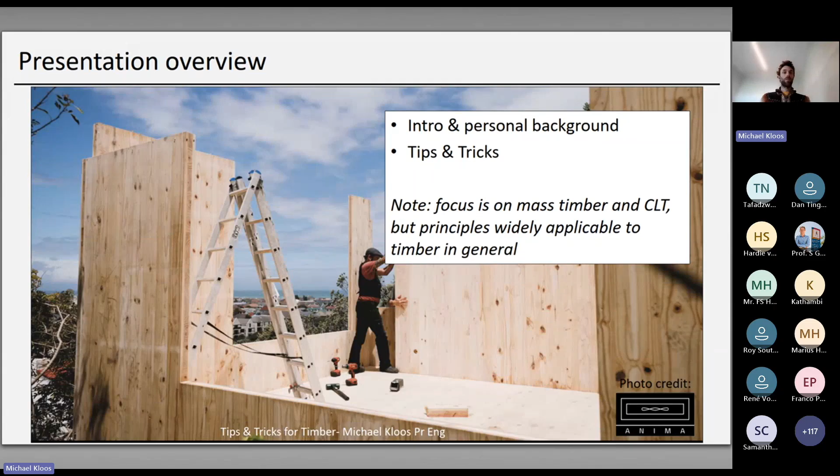So I'm a professional engineer. I'm registered with ECSA. I've been working for 7 years, worked with all kinds of materials, but I really love timber, and I focus most of my attention on timber, and I'm based in Cape Town.

Firstly, the very high variance of timber. So conventional materials that we work with are man-made and have fewer, very highly defined mechanical properties that we know very well. So concrete has 2, steel has 2, brick only has 1 really. But timber has 7 strength values that we use. And this can be a bit overwhelming when one starts, because what do you do with all these values? But I think understanding why it has these differences is an important thing. If you gain a fundamental understanding of where wood comes from, then you understand why it has all these different values.

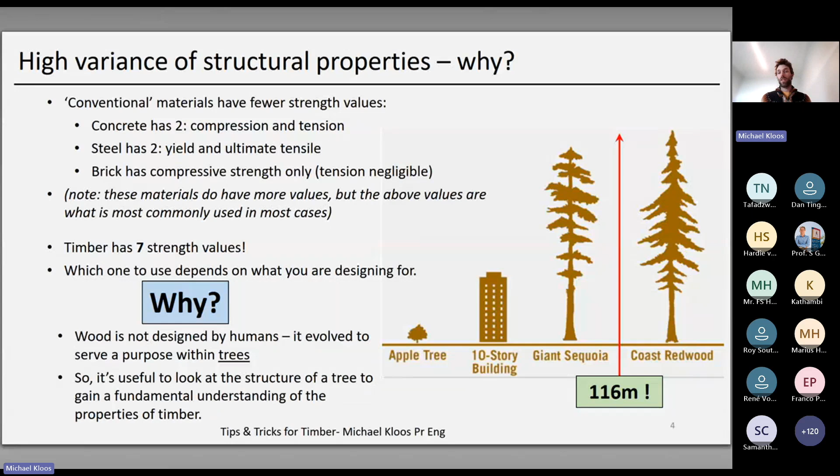So basically, wood has not been created by humans. It evolved in nature to serve a purpose within a tree, and it's done that exceptionally well. If you look at the tallest trees, they're 116 meters tall. A 10-story building is 30 meters, just to put that in perspective. So let's look at a tree and see how it grows. As a tree goes up, the compression at the bottom increases because of the weight, and then as the wind comes from the side, it bends it. So it's natural that these 2 properties, bending and compression parallel to grain, are by far the strongest.

But then if you look at how timber grows, you can think of it as lots of little straws bound together by elastics called lignin. And it has very little strength from the sides, which is natural, because why would a tree need to be strong in that direction? So to give a comparison, the weakest property, which is tension perpendicular to grain, is 1/50th of the strongest property, which is compression parallel to grain. Keep in mind, this is just S5 structural pine in South Africa, but in general, the ratios within timber are similar. So that gives you a bit of background on why the properties are like this, and helps to wrap your head around the material.

All right, the next is the serviceability design. So timber has a very high strength to weight ratio. It's higher, in fact, than concrete and steel. So this is great, but it comes with the downside that the lightness and flexibility leads to other problems, namely deflections, vibrations, acoustics, which together are called serviceability.

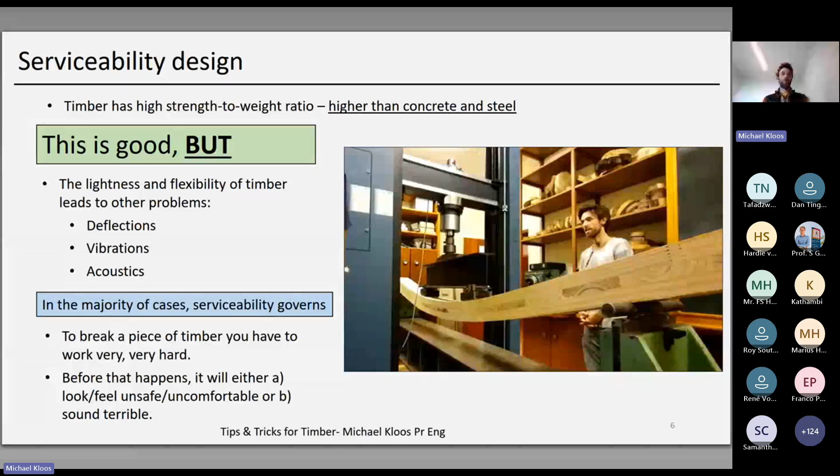So what is the solution for serviceability? Similar to other materials, you use your typical deflection ratios, like span over 300. But important with timber, similar to concrete in some ways, is you have creep. You have to allow for long-term deflection, and this is quite high. It's more or less 1.6 for SA pine in dry conditions, but if it's wet, it will go up a lot. If you have more long-term loads, it can go up as well. So just because it meets the deflection ratio in the beginning doesn't mean you're not going to have problems down the line.

For vibrations and acoustics, I'm not going to go into detail, but for vibrations, I suggest going to the Eurocode, and for acoustics, basic strategies are changes in density, separation layers, which break up the sound waves, and this would be like rubber pads between timber elements, or double wall, something like that. But yeah, I recommend that you consult with an acoustic designer or suppliers for help. So my advice here would just be, don't proceed too far down with ULS design, strength design, without considering these things early on.

For serviceability, a nice starting point are the span tables. So these quickly give you an idea of what it can and can't do. However, you need to understand the limitations of span tables. All of them have got assumptions that have been made, and you need to match those assumptions to your structure. If your structure has different loads or deflection limitations, you need to take that into account. So it's really only a preliminary tool.

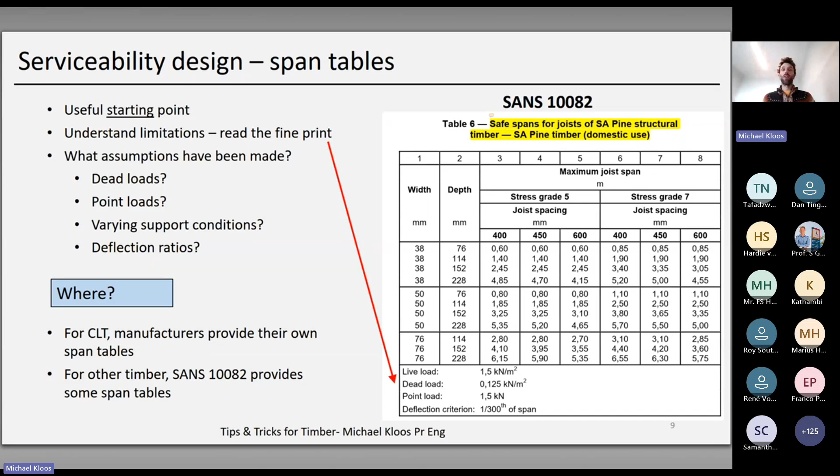Where to find these? So for CLT, the manufacturers have their own span tables. And for regular timber, you can use SANS 10082, which has span tables for your typical joists and rafters for residential and commercial construction.

Next tip or trick is the pre-planning of services. In the planning stage, it's highly beneficial to think quite carefully where those services are going to run, namely electrical and plumbing mostly. For timber framing, it's arguably a bit simpler because you can run it in the wall. There's voids in the wall. Through the studs, ideally through the center line. However, when it comes to the waste pipes, the 110 waste pipes, you have to think a bit more carefully because the typical stud is only 114. So you need to consider where that pipe's going to go. Otherwise, you're going to lose your entire stud.

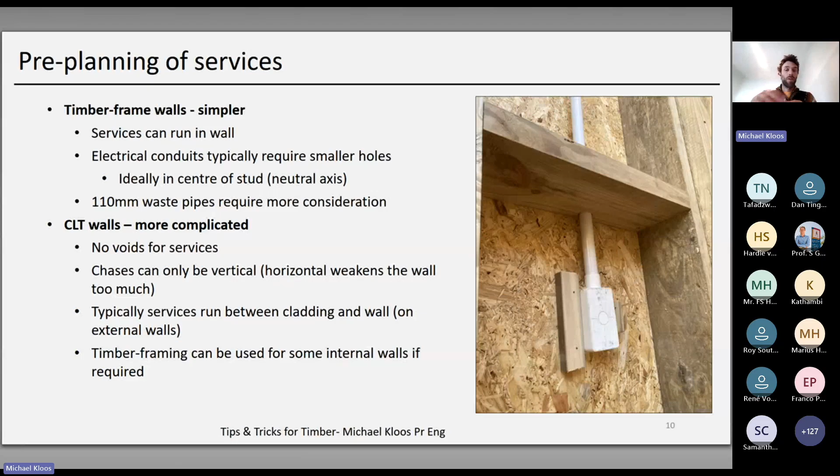For CLT walls, it's a little bit more complicated because we don't have voids. It's a solid piece of timber. So for electrical and for chasing, you can only go vertical on your walls. You can't really go sideways because it weakens the wall too much. If you have an external wall, you can run it quite easily on the outside of the building, but you have to take into account how much space you have. And what you can also do is use timber framing walls on the inside in certain areas to create voids where you can then run your services. So for instance, what we've done before is had timber frame walls by kitchens and bathrooms so that we can run our services in there.

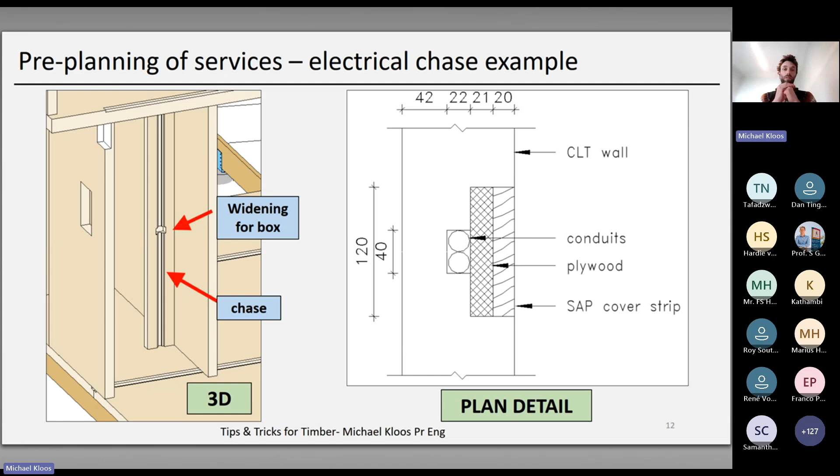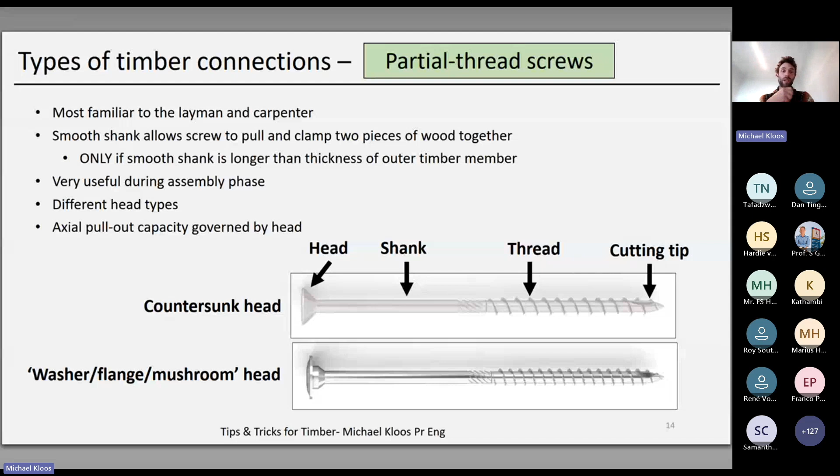And then we get our full thread screws. So these are more specific to structural timber. They are incredibly strong because you're engaging the wood along the full length of the shaft. You're getting bearing everywhere on the thread. You're not just bearing on the head of the screw.

They are more difficult to install though. They provide more resistance and they are more expensive. However, the way it fully, let's say, activates the timber and holds it together is great in a structural or in a building because you really want to hold that building together.

So a common construction methodology for CLT would be to use your partial thread screws initially during assembly. And then once the building is up and everything is flush and you're happy, then the structural fixing comes with the full thread screws. Because if you install one of these screws and there's still a gap between the two pieces of wood, you will never be able to close that gap later because the screw will hold them in place.

Okay, the next one is pre-drilling and whether or not to pre-drill. So the short answer is that ideally you'd always pre-drill because it has several advantages. It reduces the chance of splitting wood, especially if close to the end. And perhaps counterintuitively, the connection is actually stronger. Why? Because as the screw goes in, it pushes the timber away and causes little tears and cracks and reduces thread engagement. If you pre-drill, your thread cuts nicely into the timber and you get full bearing capacity with the thread.

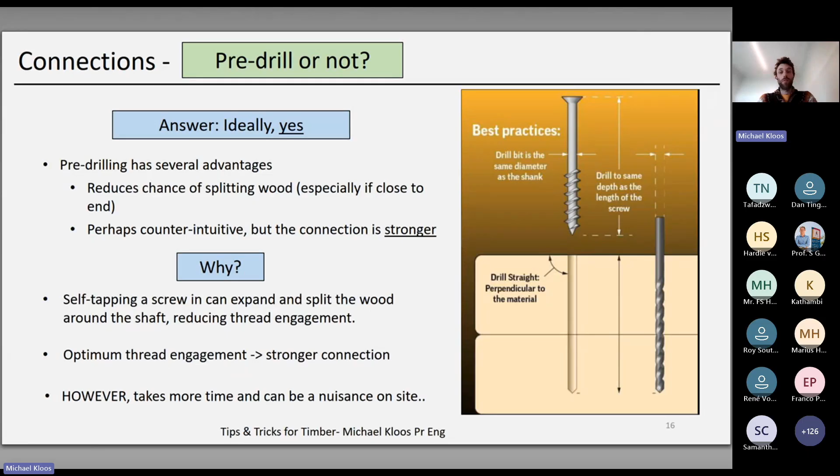Right, end grain. So this is an important one. If you put a screw into the end grain, it's very weak. You're only going to get about 25% of the cross or side grain capacity. So whenever you're going into an end grain, it's much better to try and go at an angle. Eurocode specifies a minimum of 30 degrees. This will just enhance the pull-out capacity.

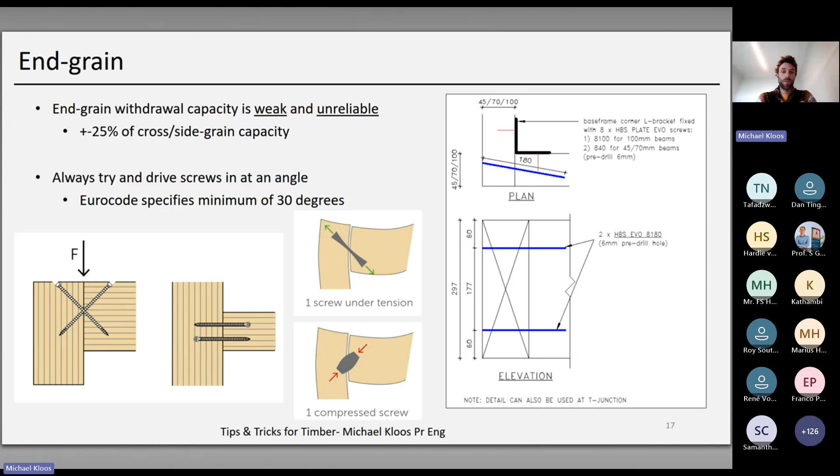Okay, some general tips for connections is to keep it simple. Use fewer types of screws on site. Don't specify 10 different types of screws if you can specify 3 or 4. Keep your details repetitive and consistent, especially within the South African context, if you were in something like CLT where you might be working with contractors who aren't familiar with the methods or the material. And then keep complex connections for complex buildings and simple connections for simple buildings.

Consider your fire resistance early on in the design process if you are needing to do a fire design. Connections are critical in the fire system. And then a useful rule of thumb for timber connections is that a large number of small diameter screws or dowels or nails perform better than a small number of larger diameter fasteners. So it's better to use lots of small connections as opposed to fewer big ones. Of course, this does take more time on site, so there's a balance, but it's a fundamental rule of thumb for timber.

All right, the final tip I would give is don't underestimate waterproofing. Water is magic. It can go in any direction and it will find its way into your building if you're not careful. So in my opinion, you always need to have at least 2 lines of defense against water. You cannot rely on only one system. There's too many variables at play, human error, material. So it's in your favor to be safe here, even though it's going to be a bigger cost. You're going to save yourself a headache, and your client a headache if there's ever a problem.

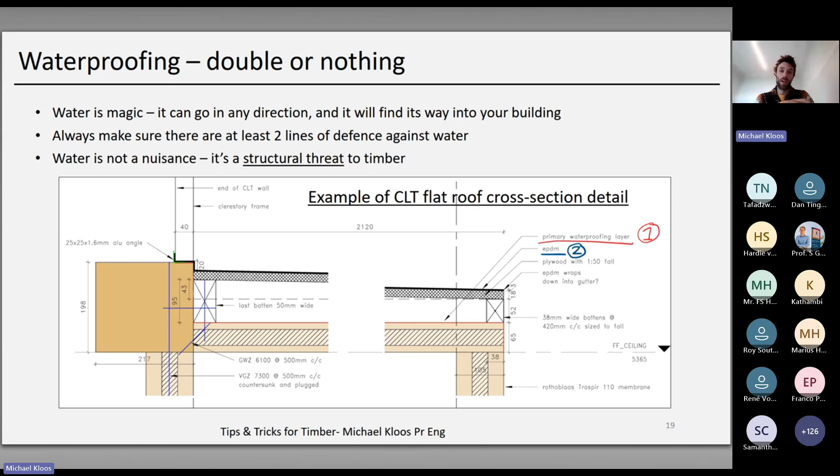The added risk here is that water is not just a nuisance. In a brick building or concrete building, if things get wet, it's obviously terrible. There might be mold or paint coming off, or it's leaking, but it's not a structural threat in the sense that it's not damaging your material. Whereas timber rots when it gets wet and stays wet, and that weakens the material. In the worst case scenario, if you don't know it's leaking and it's in an area where you can't see, the timber could be decaying and it could eventually fail. So there's an added level of risk when it comes to water and timber buildings. That means you really have to prioritize waterproofing in your design.

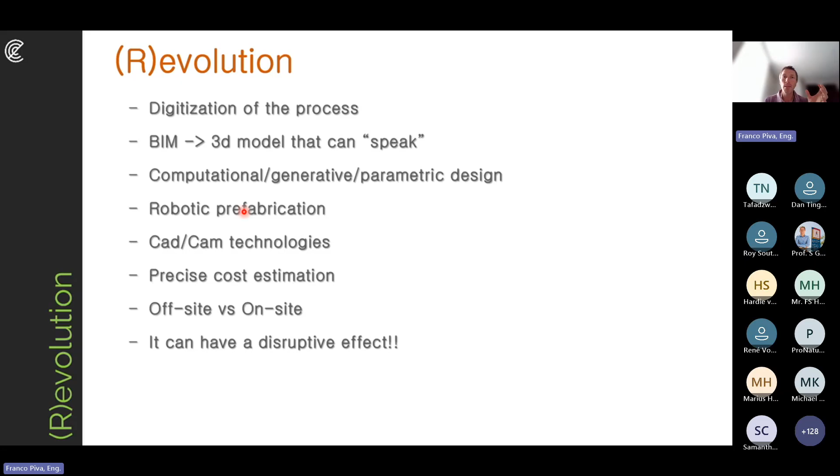We see timber on site, but before having a CLT panel, before having a glulam beam on site, there is a process to engineer it, to draw, to prepare the 3D drawings, to prepare the files ready for the CNC machine. And the acronym I really like, which is behind the process, behind a glulam beam, behind a CLT panel on site, is DFMA, design for manufacturing and assembly.

Three words: design, the engineering process, to draw the element, to think about how the element will be; manufacturing, how to produce it; assembly. There is something in between manufacturing and assembly, which is transportation, logistics. In many cases, for our projects, we have to face the problem: how can we transport the elements from the factory to the site?

Everyone loves prefabrication. We all would like to have prefabricated elements and assemble them in the blink of an eye on site. But how can we transport them from the factory to the site? In the factory, you can manage big elements, super wide elements. But what happens when you have to transport them? So DFMA covers all of this, from the design to the assembly, everything in between.

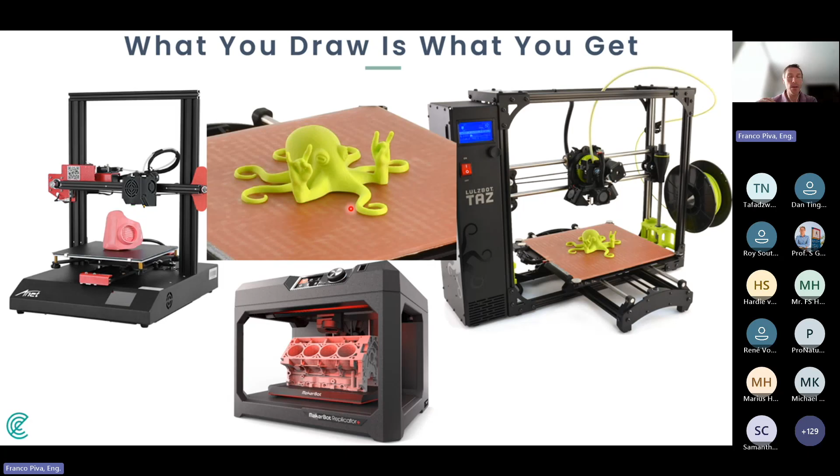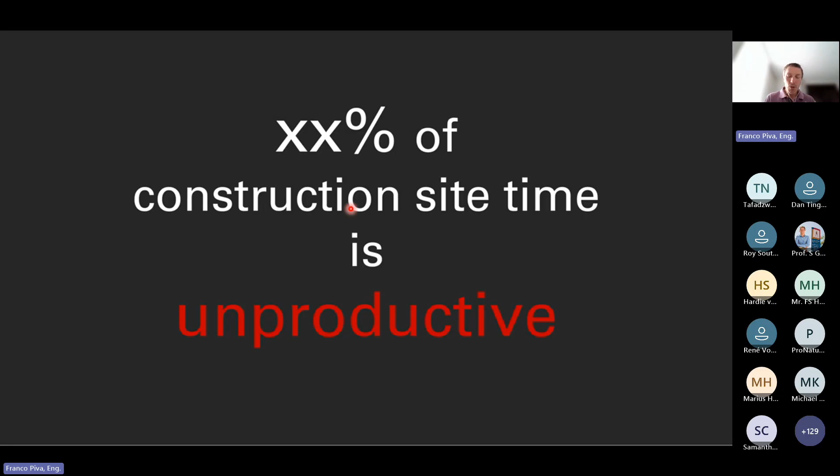In the timber industry, we are not using 3D printers, but we are using CNC machines, which means that there will be a machine starting from a bigger element, removing what is not needed. And basically, at the very end of our work, after we completed the production drawings, we can see on a simulator how the machine will work. We can exactly foresee how many minutes, how many seconds the machine will take to prepare the element. And we can also, of course, check if there are mistakes, if there are problems, if there are clashes in the machine. We can check everything here. We can see if the sequence is okay. If there is something wrong, here is the right time.

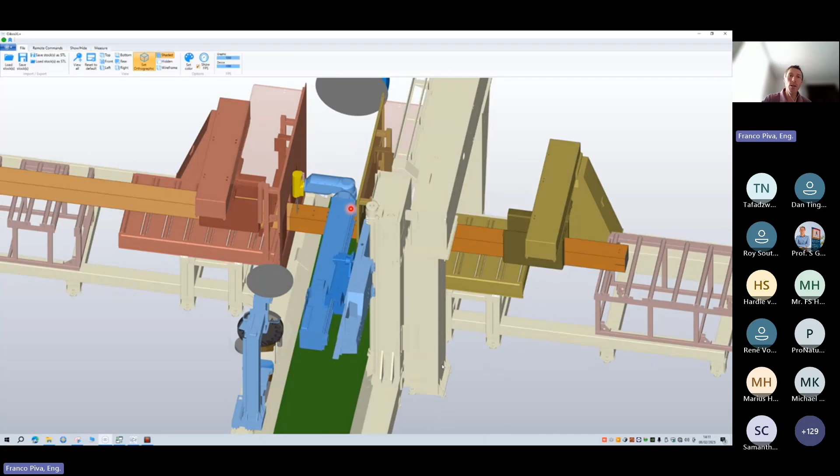And to check here, the model is for free. It doesn't cost anything. It's just a few minutes for us to check if everything is okay. Having a problem in the production takes a lot of time, a lot of money, a lot of problems, people yelling at you, etc. So again, first design and then the production.

There is a book I really like, and I suggest you read it if you have the possibility. It's written by a Danish professor, Bent Flyvbjerg. The title of the book is How Big Things Get Done. And if I had to summarize the book in just 4 words, I would say: think slow, act fast. Take the time to design. Timber is beautiful, but using timber is not like we start doing something and then we will see on site later what to do. No, with timber, you need to shift everything to the beginning. Design, and then you assemble the elements on site.

The bad side of that is this: Pareto's principle. Pareto is an Italian economist, an Italian engineer. He lived like 140, 150 years ago. He said that 20% of the people in the world own 80% of the money. Probably now it's more like 1-99, but at that time it was like 20-80. I try to reuse this principle, to adapt this principle to the building industry. They use this 80-20 for many aspects, but I said, what if we try to use it in the building industry?

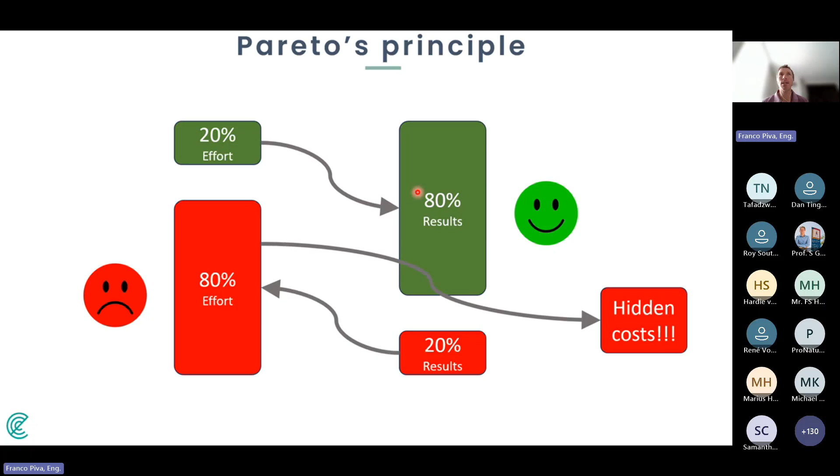With timber, this is the biggest problem, in my opinion, because the drawings have to be so detailed on the production side. We are not saying that the architects and engineers need to prepare such super detailed drawings. But as timber engineers, we need strong and reliable input from you, good drawings, because the digital model is super detailed. Every single element has to be drawn. And then once you're on site, what you see on your screen is what you get on site.

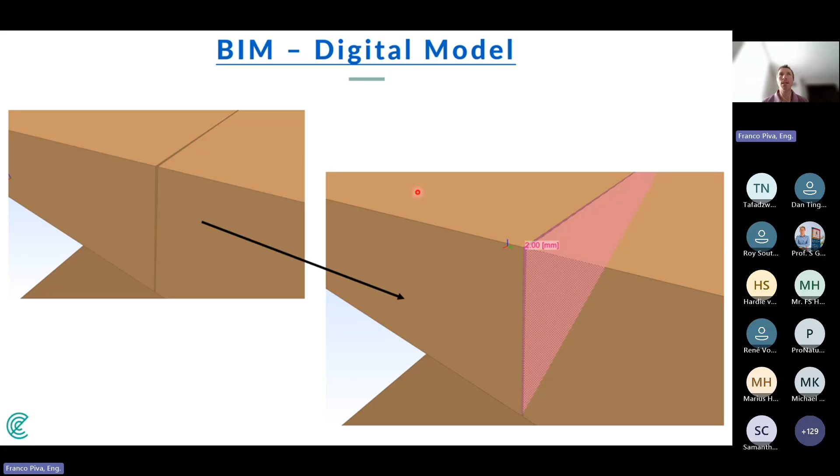It's like a 3D printer. You create a very sophisticated drawing, but then there is a CNC machine making it, and you see how it will look. But you have to consider every single millimeter. If the tolerances are 1 millimeter there, 2 millimeters there, 5 millimeters there, not you as an architect or engineer, but the timber engineers have to take into account all these tolerances to avoid problems on site. We always aim to reduce the wasted time on site. We always aim to reduce the unproductive time on site.

I like Lego. I've been playing with them since I was a child. And think about this. This is one of the nicest boxes they created. How long will it take to assemble this box or other boxes? And compare this time to the time Lego took to engineer it. They took years, 1.5, 2 years, many people working on that project. But then you don't take 2 or 3 years to build it. In a few hours, you can build this amazing car.

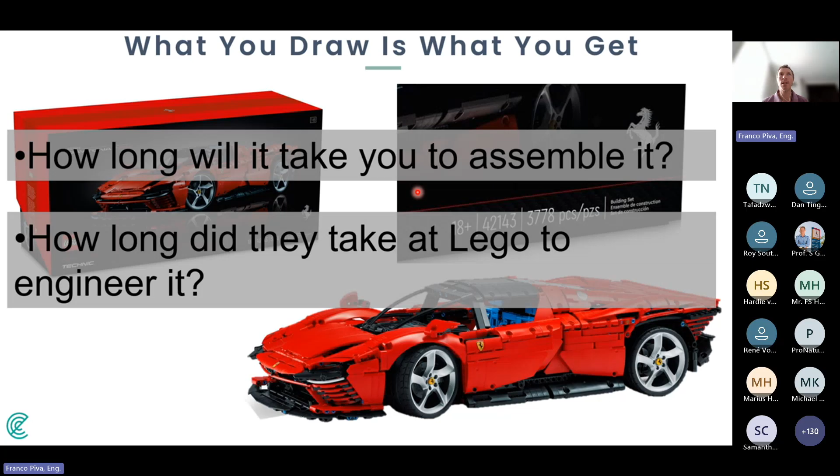Why? Because there is a good project behind it. There is a project, instructions, you assemble it. You don't have to drill holes to change the element, or wait to have the right bricks. And again, the core is think slow, but act fast. Take your time to design and save time, a lot of time, on site.

So let's come to the conclusion, the last 2-3 slides of my presentation. Look at the MacLeamy curve. Horizontal is the time, vertical is the design cost, effort. Look at the orange line, the cost of design changes. The more you go to the right, the more expensive the changes will be. But at the same time, look at the blue line. At the beginning, you can change the project completely. Day one, you can change everything. Low cost, high impact. Low cost, orange, high impact, blue.

After a few days, it will be mid cost, mid impact. And then there is a day too late. This happens when, like after 3 months working on the project, the client or whoever, the developer, the builder, tells you, you know what, I would like you to make the building a bit bigger. That is the day too late, which means low impact, high cost.

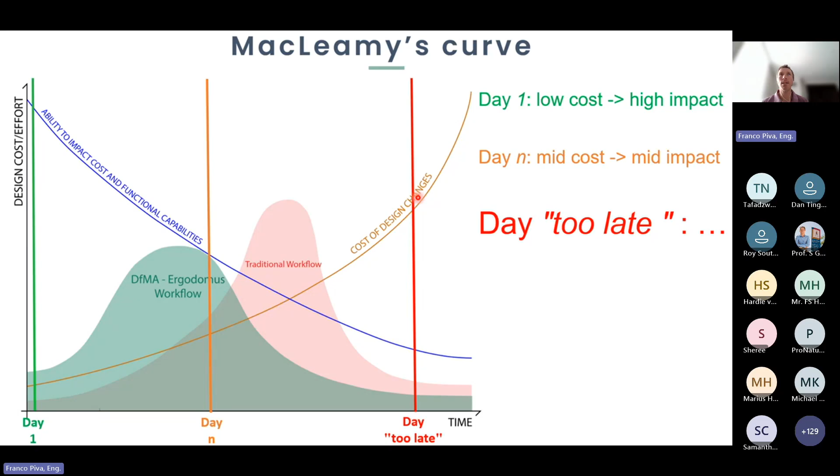If you transfer this to the world of timber, I like to use this metaphor. Day N to day too late is mass timber. But if we start thinking about using timber on our project from day one, then it is smart timber. After day too late, and it happens many times, they involve us, or they try to involve us, after day too late, it is mess timber. And in terms of costs, this is what happens. Mass timber is quite expensive. Mess timber is terrible. It's too expensive.

So the conclusion in many cases is, you know what? We wanted to go for mass timber. We love timber, we love sustainability, etc. But timber is too expensive. We'd better go for concrete. It can be that timber is expensive. I'm not saying the opposite. But when did you start thinking about timber? Because if you started on day too late, for sure timber is too expensive. No way, it's too expensive. If you started on day N, quite expensive.

But if you start from day one, and as Michael said, you consider all the things about the vibration, deflection, screws, since day one, the very first day, you're still working together, architects, timber engineers, structural engineers, to come up with the most optimized solution to use timber. In some cases, it could be like you move a wall by 30 centimeters. You optimize the shape a bit.

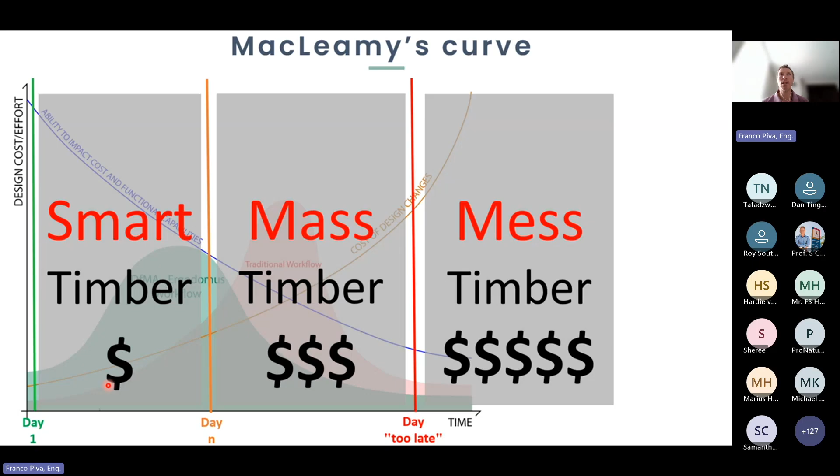We're not talking about building boxes. We're talking about making timber the most cost-effective material to go for. But this has to be done on day one. On day too late, it will never succeed. It will be just pain and a lot of emails, etc., between the different players. So we really need to move from mass timber to smart timber. And this is the solution of the

answer to the question. As a final slide, 40 to 50% of construction site time is unproductive. Try to think about the example of the 100 days. You have people working 100 days on a site. Every day, instead of working 8 hours, it's like they work 4 hours, more or less, 4 or 5 hours. Maybe one day they work 8 hours, but the day after it could be just a couple of hours.

This is a general number, based on research I found on the internet about productivity in Europe. Maybe in North America it is a bit different, in other areas it could be a bit different, but it is always around 40, 50, 45, 55. That is the range. The most productive, the most efficient industry, or one of the most efficient industries, is the automotive industry, and their unproductivity is around 3 to 6, 7%.

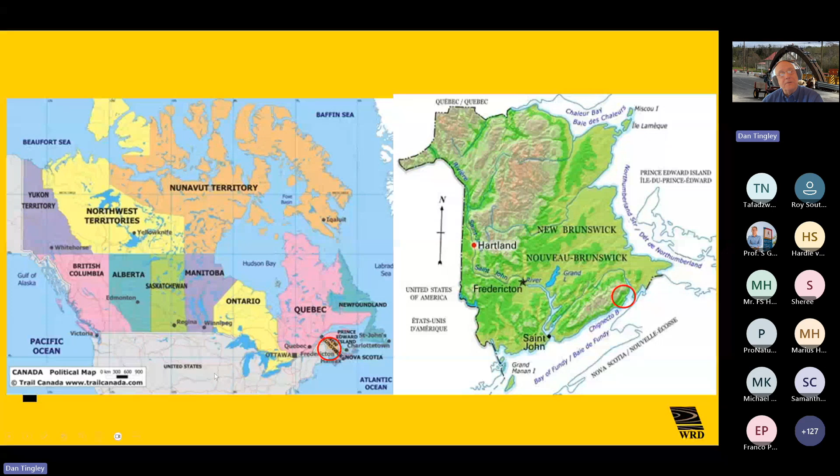Samantha mentioned I'm currently in Eastern Canada on the East Coast, about 1,000 miles east of Franco, on the Fundy Coast. And you can see here a little map of Canada, and a couple of circles right where I'm located today, just for those that are interested. If you're ever out this way, come and visit.

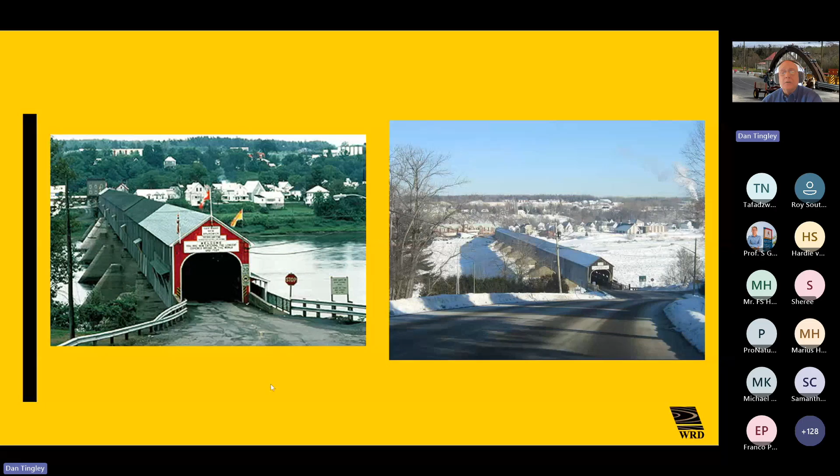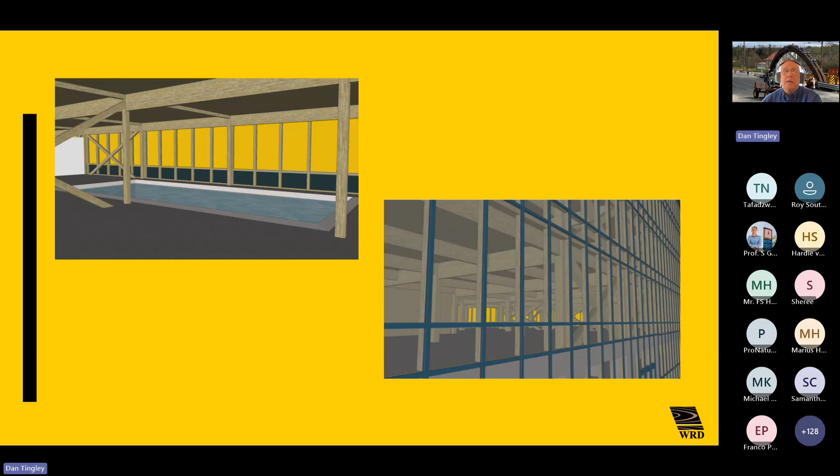But that's where we're at today. And the sorts of things we do at our lab is look at fire testing to develop strategies for fire resistance ratings, assemblies of systems that will provide for fire protection, and those different fire protected systems allow us, for example, to build these high rises either using CLT or an assortment of different timber strategies.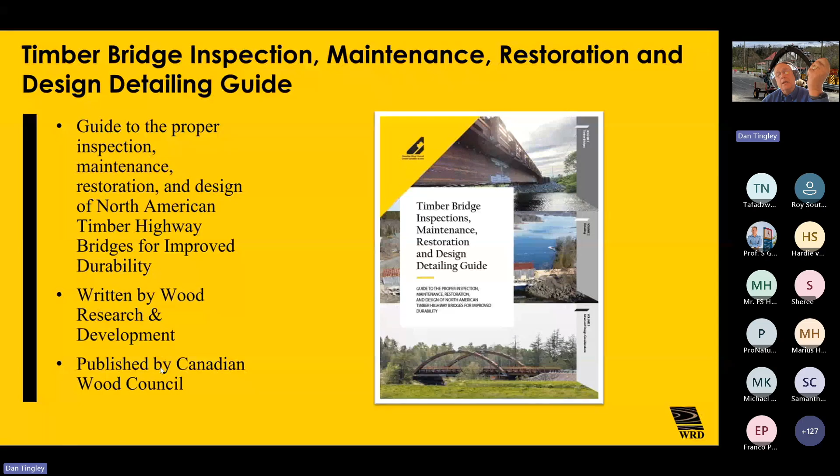In 1962 in North America, 80% of our bridges were timber. By the time we reached Y2K, less than 1% were being built in timber. Today, that's moving back to timber as cost advantage and carbon concepts are all impacting the way we think about timber in outdoor and timber structures. So these are important aspects of what we do today in terms of our designs.

Not bragging, just a little bit of expression and novelty here. In '96, we won the Charles Pankow Award for Innovation for High Strength Fiber Solutions. In '97, the Nova Award, which is all construction products, for high strength fiber solutions in their design. That's led to many award-winning designs. As you can see here, this bridge, for which we recently won 4 different awards for carbon.

This bridge was to be built in steel, and timber was opened in the tender. A specification allowed us to submit a timber solution, and the steel solution in this bridge was 2,760 metric tons plus. This timber solution was minus 970 metric tons. And so these are some of the reasons, along with cost. This cost was 32% less than the steel option.

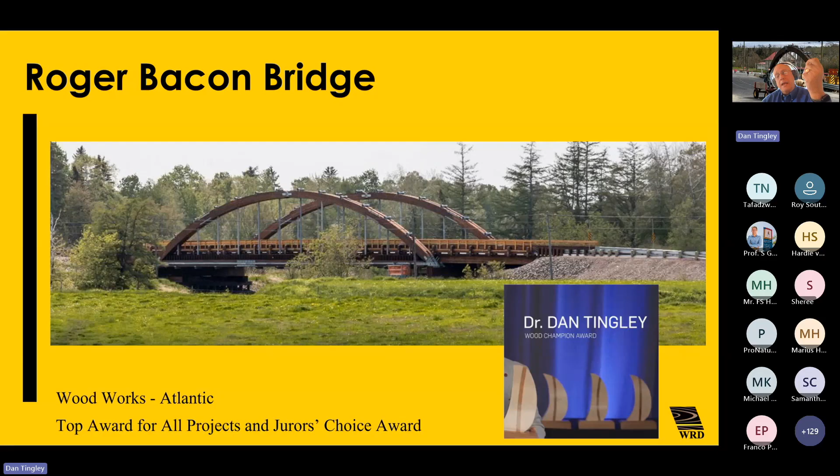It took half the time, as Franco talked about, building a Lego kit, treating it after you've machined it so that there's no bright wood, and then building it on site in half or a third the time is the tip to winning not only these awards, but the hearts of your buyers. So 50 years ago, my designs looked like this.

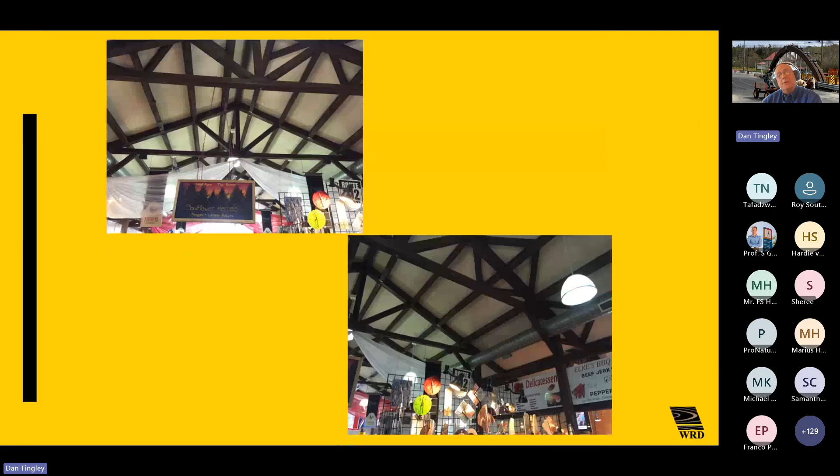Or this one in 1988, 535-foot clear span, 14 stories high, all timber. I didn't call it mass timber back in 1988. I just said it's a glulam building. It's 2/5 of a basketball, and we're going to store coal in it because SO2 isn't a problem for timber, and concrete and steel just wouldn't cut it. And so these structures were very popular in the day for things like potash, for example, and still are today.

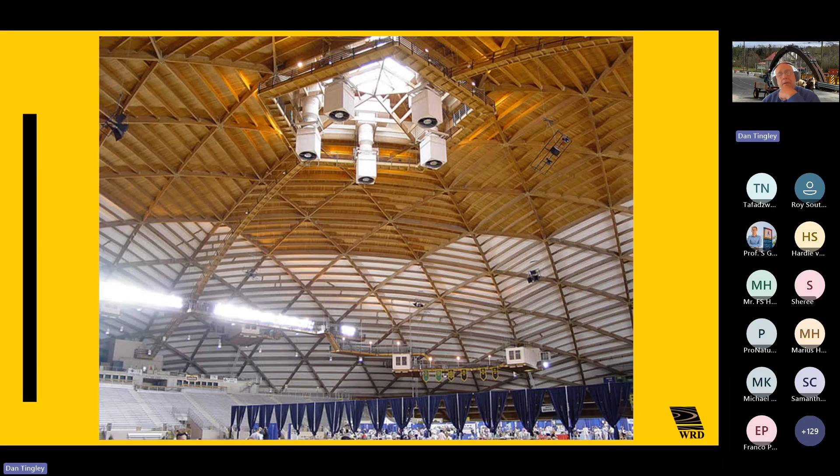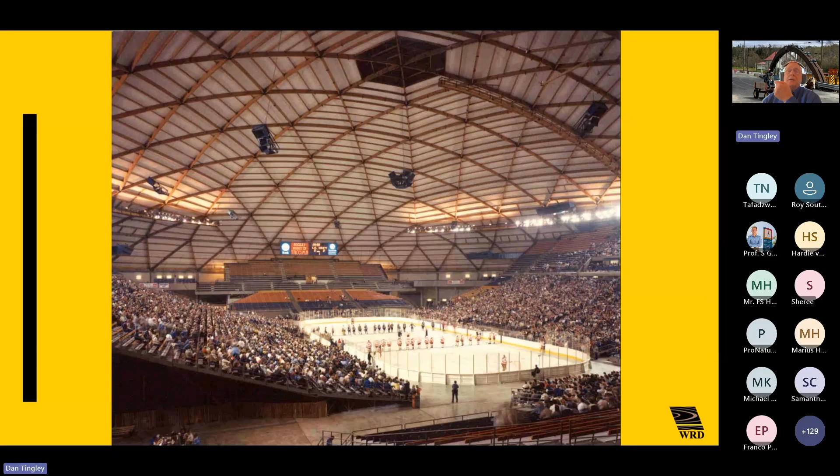Flagstaff, Arizona, for example, with a Varax dome, it's 2/5 of a basketball. Tacoma, near Seattle, Washington, as you can see inside here, all timber. And these are dating back to my early days in the 80s and 90s. This is in Vienna. It's a wastewater treatment facility. Only the Viennese with oil money could make a wastewater treatment facility look like these reinforced S-curve glulam beams.

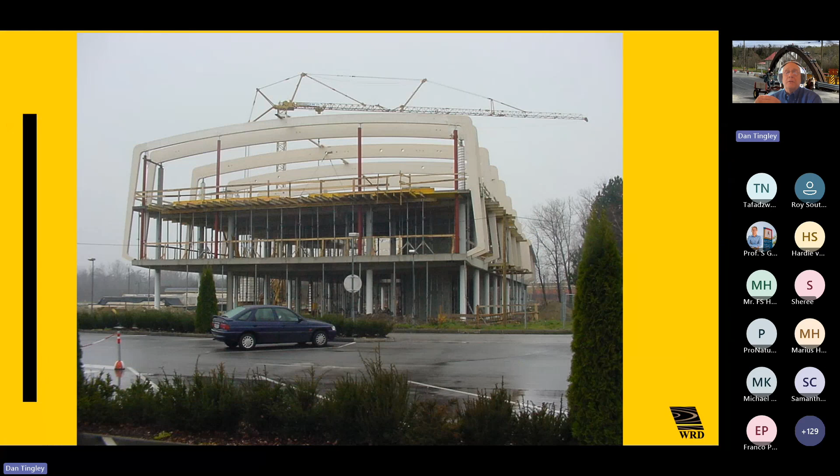Or this one here, it's a furniture display hall. This is what it looked like when it was finished 25 years ago. And as you can see here, even a mass timber walking tunnel in this particular building. This is under construction. And this is a unique building with a knife plate, dowel, a rigid C shape on top of a pinned connection in a concrete column.

I was visiting a bunch of old structures I designed back 25 and 30 years ago. And this is one of the owners here of this current building right now, very happy with this mass timber building, built 25 years ago with timber.

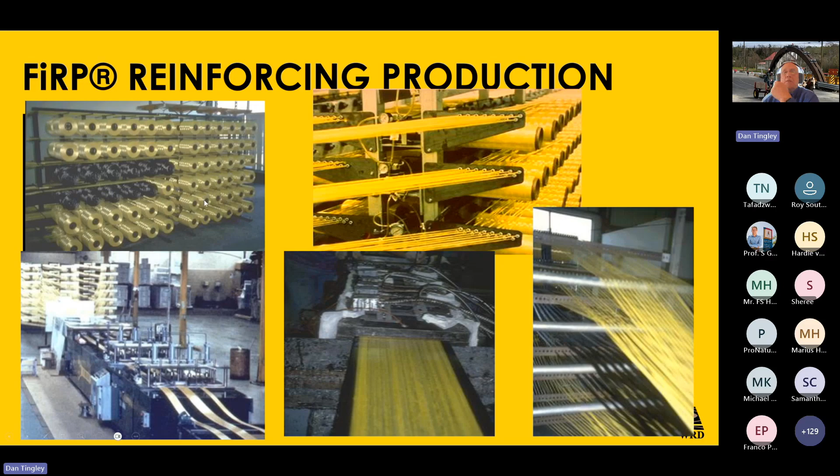So I have a few patents in this area, most of them off now, 42 to be exact, in this whole area of producing reinforcement using Kevlar, carbon, glass, pre-tensioning, pultrusion, pulforming, allowing the fibers to get saturated with a resin in its liquid form, kicked over in a heated die that allows it to turn into a solid, with up to 1 kilometer of fiber on one reel, 5 times the strength of steel at 1/5 the dead weight.

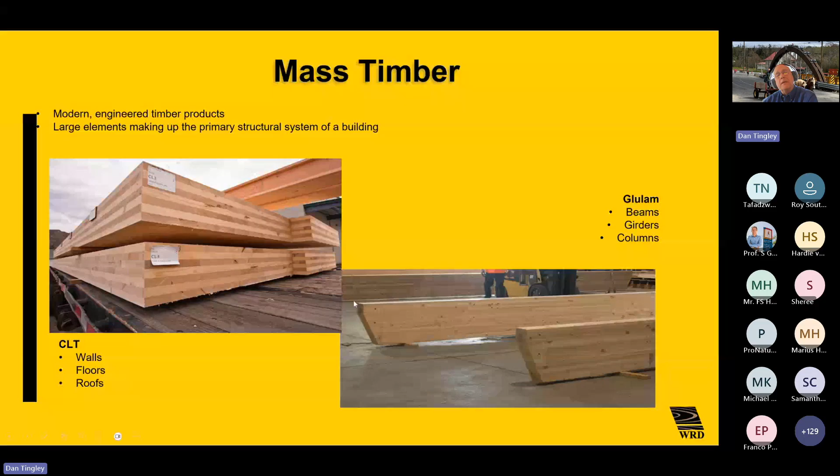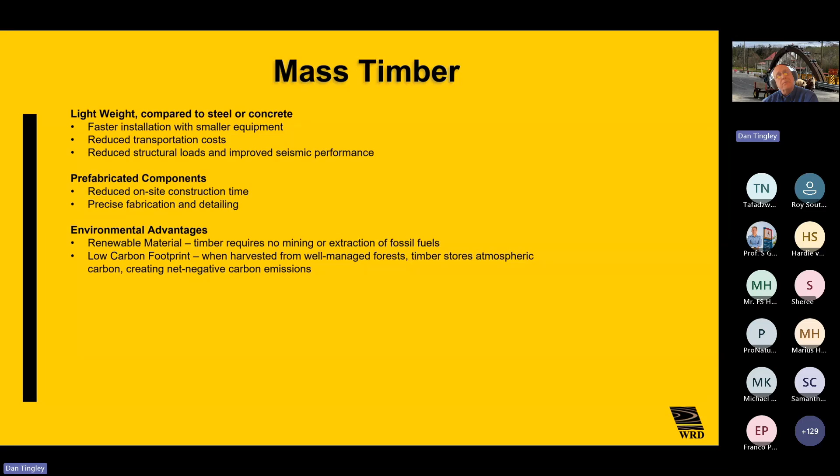As you can see, CLT and GLB, glulam beams, 2 examples of mass timber here. Lighter weight compared to steel and concrete, fast install, reduced transport. You can prefabricate your components, environmental advantages like low carbon footprints and renewable material.

Everything from nail laminated timber to GLB to solid sawn to CLT panels that go on top of these post and beam or platform frame structures. You can see LVL, another form of it, Paralam, PSL, LSL, all of these different types of mass timber, from oriented strand board to the traditional plywood. Wood is back in action.

When I graduated back in the early 70s, I was 1 out of 14 people in a class. And I watched the great era of precast concrete take place in the 80s, 90s. There were 36 glulam beam plants in Canada with the highest production of glulam in the world per population, turned away to 3 plants by Y2K.

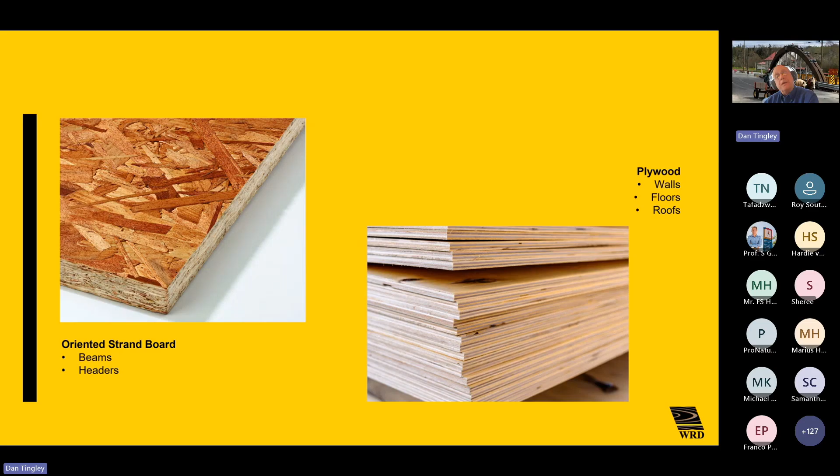That's back on the move now as we see glulam beam plants setting up all over Canada and all over North America, producing these sorts of structures, as you can see here, in different parts of Canada. All mass timber, all going higher and higher and higher.

We have an office in Saudi Arabia where they tell us now that the Saudis are looking to build a 126-story building by 2030, platform frame concrete core using CLT. So these are the ways things are going in our world today as we look at timber coming back in vogue for uses not only for swimming pools, where they're obviously a better choice due to the fact that wood just doesn't rust, but for a host of other reasons. These are the current structures that we see all over that are going forward.

So how does advanced fiber fit into the equation here? In everything from tension reinforcements to shear reinforcements and so on. Well, the primary place that we look to have high strength fiber is to increase the capacity of timber structures. Timber is anisotropic. That means it has different properties in different directions. And some of its weakest properties are tension perp, as we heard earlier. And as a result of that, what we can do with high strength fiber is use it strategically, like rebar in concrete, to supplant the weakness in the anisotropic material wood.

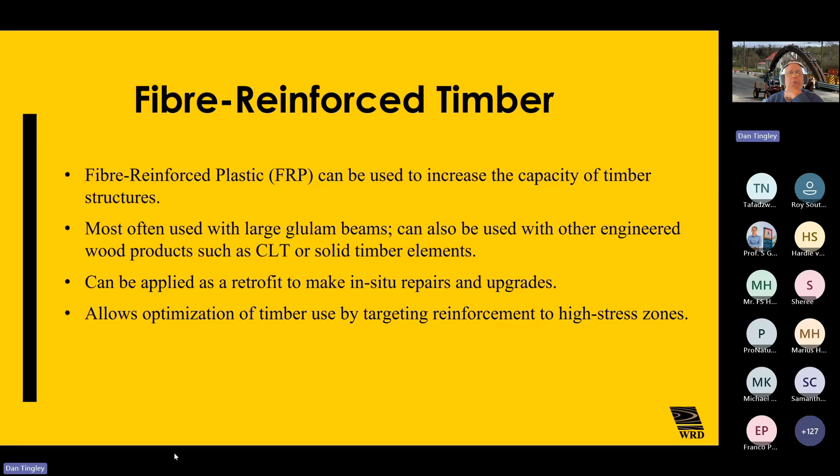But if we're going to do that, we have to also be careful that the wood is hygroscopic. That means it breathes in and out moisture, and when it does, it shrinks and expands. And so anything we're going to attach to it that is not organic and doesn't have those characteristics, we have to be very careful how we design it so that when it attaches to wood, it doesn't spall off or delaminate over a period of time, so the plane sections no longer remain plane, and it's not a true composite. So this is how we work toward this in our reinforced concepts to be able to get where we're going in terms of using high strength fiber.

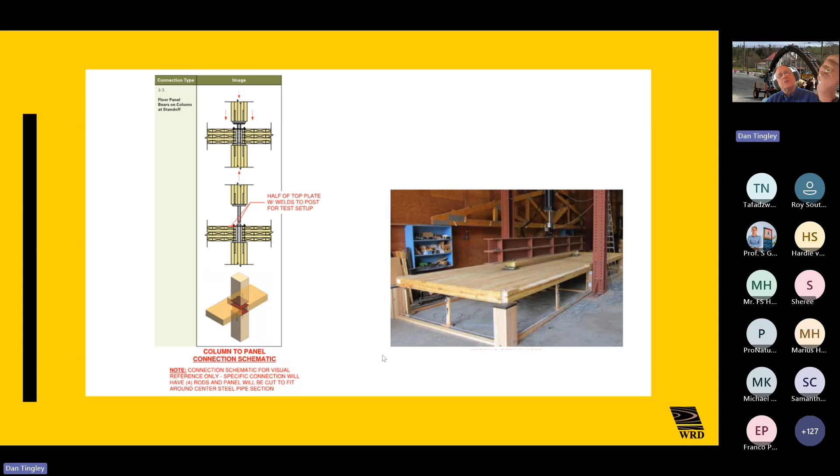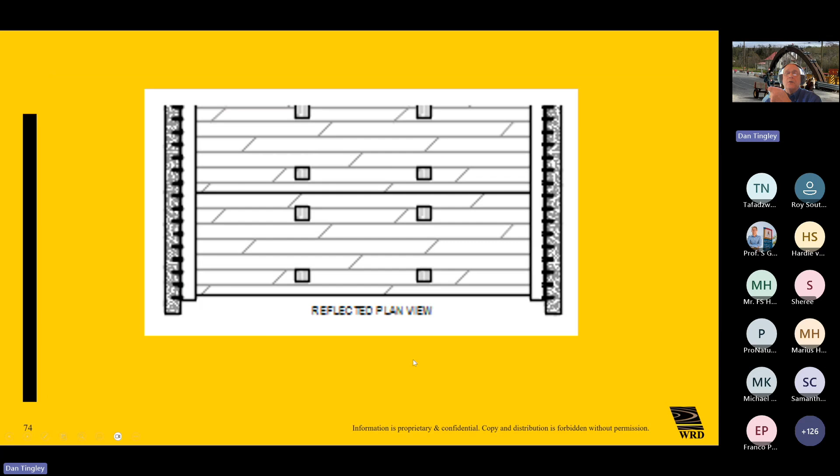One of the key places that CLT is benefiting from high strength fiber is through the improvement of minor axis horizontal shear capacities in either a platform frame or a post and beam frame, as you can see here. Particularly in the platform frame, we see this problem as a big one traditionally with CLT because of minor axis, what we call rolling shear or transverse shear. And so this is a big feature in CLT that reinforcement allows us to overcome by the placement of shear reinforcement in strategic locations, for example, at the CLT interface with a vertical column, as you can see here, leading to these sorts of advantages in our system in platform framing.

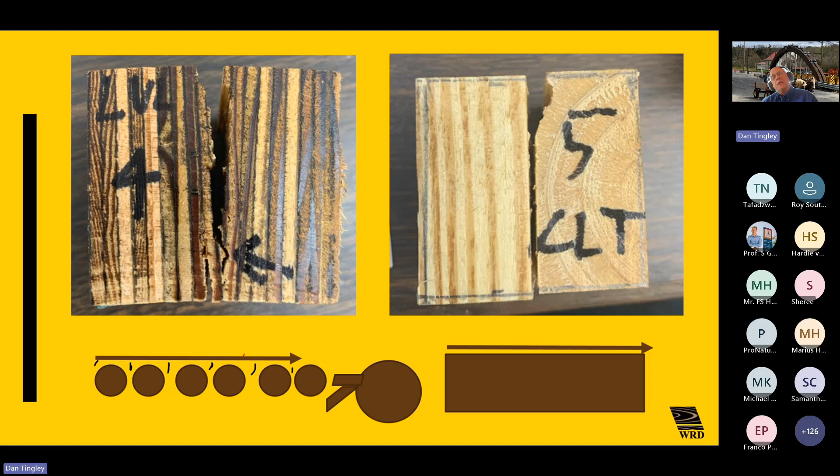I won't belabor this, but if you want to ask questions or seek information from me after, you can see the enhancements here from using high strength fiber to overcome these problems, such as rolling shear. And rolling shear used to apply just for plywood, for example, because of the transverse grain situation in horizontal shear. But as you can see today with CLT, it also is a factor, as you can see in this picture.

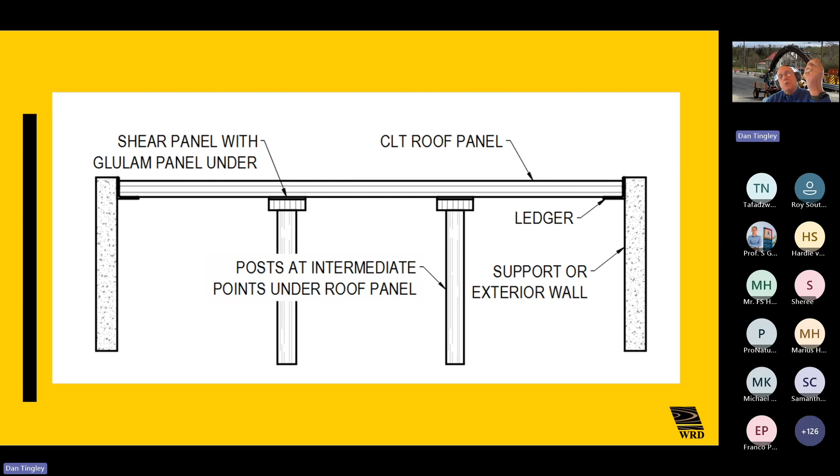So this is how platform framing allows us to use high strength fiber and get where we're going to reduce minor axis shear. And here's an example of a minor axis shear reinforcement, as you can see here in the picture. And you take a CLT in this minor axis shear issue, it can either be a piece of FRP or bonded a piece of GLB, but the most effective and unobtrusive solution is, of course, to use thin layers of FRP that get in and do their strategic jobs at these locations.

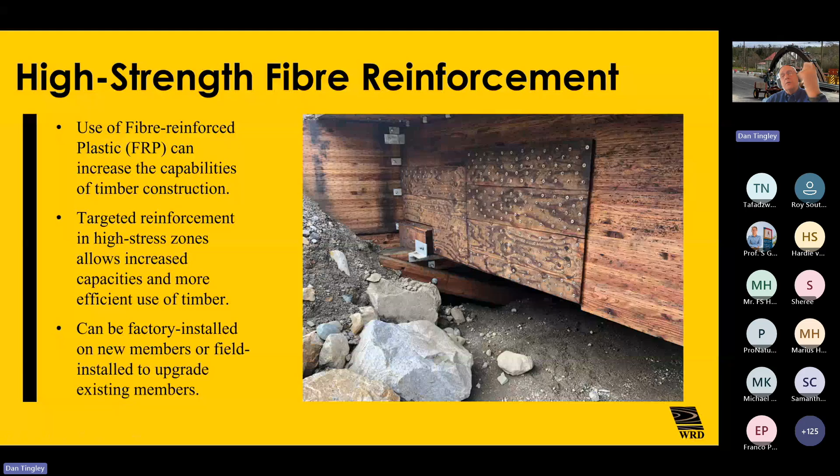You can use them also in reinforcements for shear for bridges, where the shear is a max at the end of the span, and you're able to improve its performance either by pre-assembly, as you can see here. This is where bridges are going today in the world, with total pre-assembly with a TL4 truck crash-proof rail system, and as you can see here, the girder unders. And these high-strength fibers are allowing our spans to exceed previous spans.

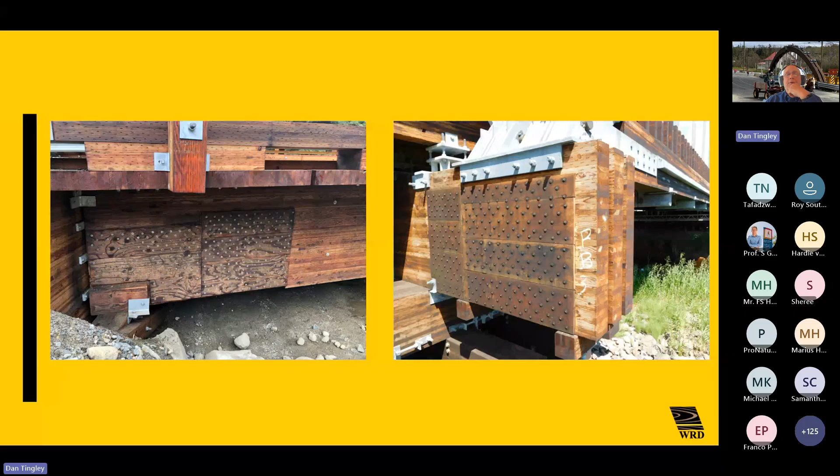We now work with girder under spans through FEMs, which I'll talk about here in a minute, fixed end moment connections that allow us to move up to 100-meter clear span girder under and carry trucks and traffic on a 4-lane highway bridge. And so that's where this is going with these small components that use these high-strength fibers as a way of improving performance in the end product, the composite.

It has a coefficient of thermal expansion that about matches wood versus steel, which doesn't. I can't have plane sections not remaining plane, so I have to bond it with a material made in a way that accommodates wood shrinkage and expansion also transversely. So this fiber has 0 strength transverse and 5 times the strength of steel on the longitudinal. And that single piece of glued reinforcement we're using here, 0.07 inches thick, is equal in tension capacity to the whole timber beam that you see supported here.

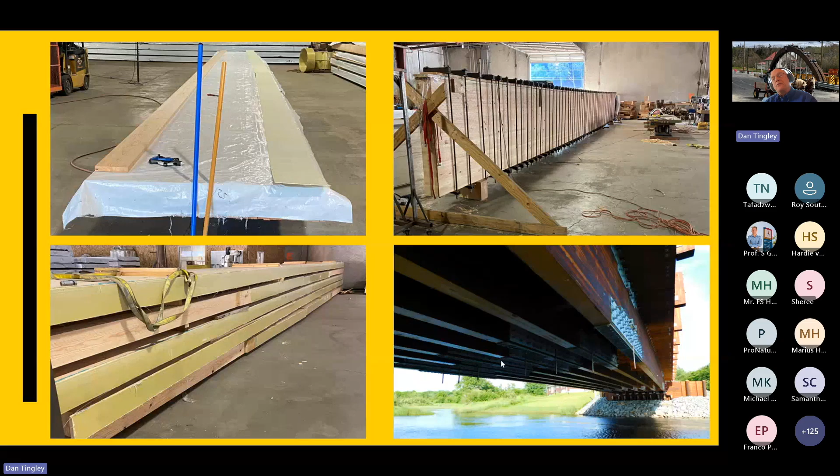So then when I get in a strategic location, as you can see in this bridge on the bottom right-hand corner with an FEM wood welding joint there at the end, you can get that reinforcement to do the heavy lifting you're looking for to get timber back into vogue in long spans.

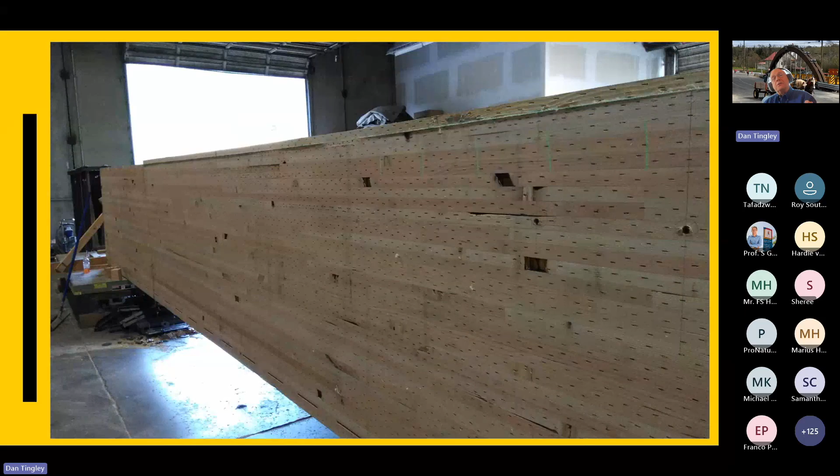As you can see here, rolls of reinforcement, 5 times the strength of steel at a fifth the dead weight, strategically manufactured to place in position in these long beams to get us where we're going, as you can see here, with a setup producing the adherence of the FRP to it, so that it's bonded integrally to the surface and does not step out of plane sections remaining plane, as you can see here.

This also accommodates fixed end moment connections, which are big today, what we call wood welding. This is where we're able to take short pieces, say 11 meters, because you ship it in a container. It's hard to ship break bulk around the world today, but we designed for plants in America, Australia, and Canada, where they basically produce 11-meter sections, put it in containers, and ship it around the world. Well, what can you do?

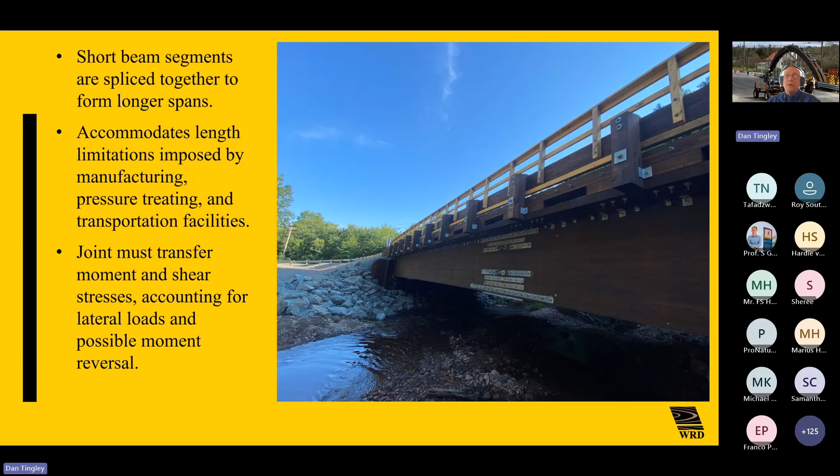Well, if you want to produce an 80-meter clear span bridge that's carrying truck traffic, you have to have a fixed end moment connection that is slip distortion resistant. So by using an epoxy high strength fiber connection combination, you're able to get to what we call slip resistant or distortion resistant connections that truly represent wood welding.

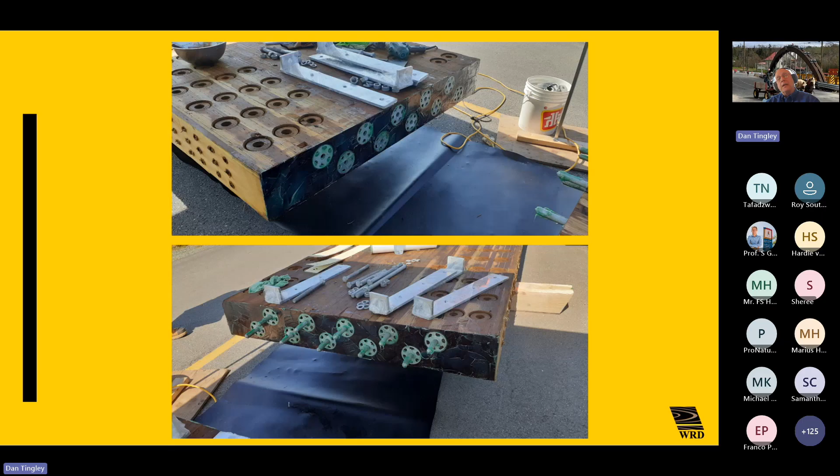As you can see here, this is pre-manufactured, post-treated, machined before treatment, so that there's no bright wood. And you can see them assembling here using an epoxy and reinforcement, assembling an FEM connection that gets this beam across the gap with small sections turning into big sections through a wood welding program.

It's unique designs that are based on a lot of structural assessment, and this is where the world's going today with high strength fiber and slip distortion proof connections on a wood weld basis. You can see here the Kevlar being used underneath this. You see the plastic surrounding the steel.

Steel's coefficient of thermal expansion is so great that if I tried to make an FEM slip distortion resistant out of steel bonded to wood, within a very short period of time the wood would have changed dimension. The coefficient of thermal expansion would have been so great, 3 orders of magnitude greater between steel and wood, that the steel piece would have debonded from the wood and trouble would occur.

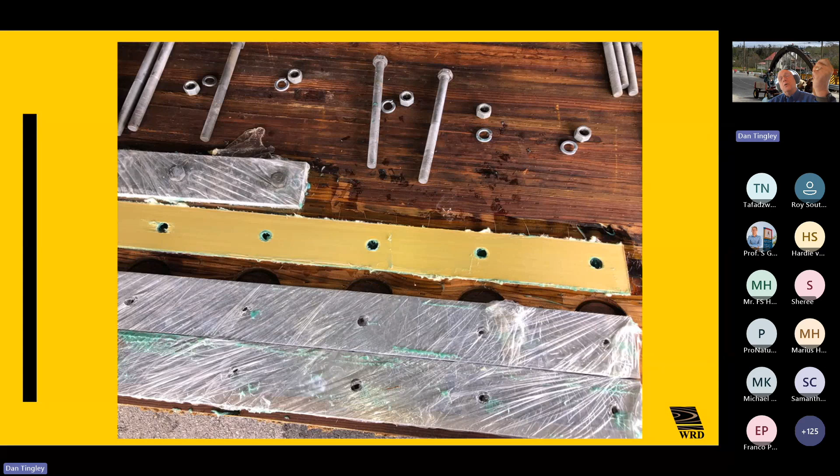And so we isolate the steel by wrapping it in saran wrap so that it can't bond to the wood in any way inadvertently to produce this FEM or fixed end moment connection, as you can see here, with a high strength fiber wood welding the bottom of this beam.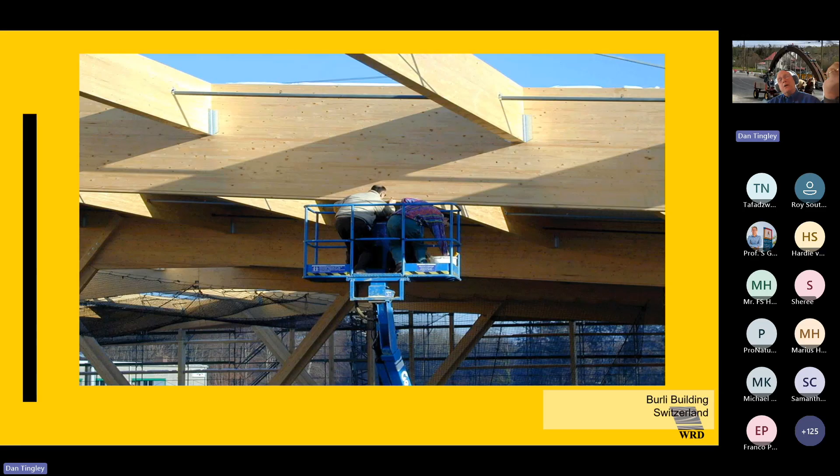This is me doing some quality control checks when I had brown hair, and I did have hair. That was a long time ago with high strength fiber. Now high strength fiber is just a household word in the use of many, many high strength beams that are put out today in the marketplace, as you can see in these pictures.

This is Zollig, for example, producing the longest glulam beam made with FRP for McDonald's in their McDonald's building with Lothar wood in 1999, the big blowdown series of wood where he designed these beams. And this is half a length of beam with 10 smart cars parked in front of it. And we lifted them into place and we made this McDonald's distribution center.

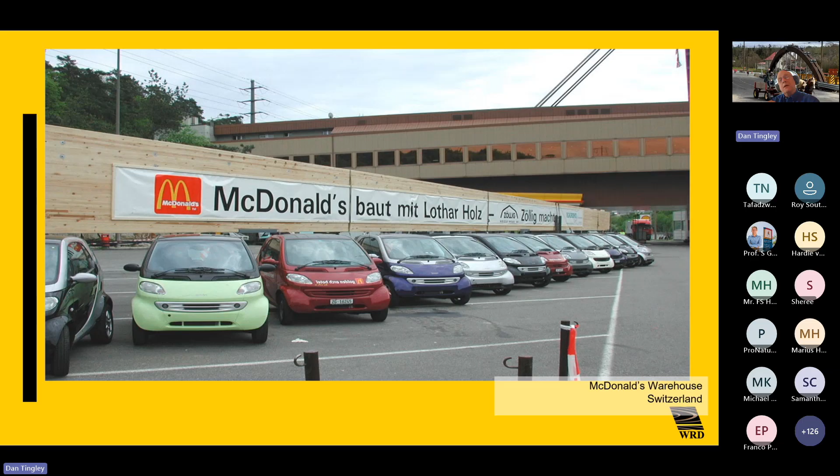We put it together in 7 days, along with Franco's saying, it's all in the planning, it's all in the design. And don't be wringing your hands on the job site, blowing off the time. You want to be spending your time on the front end thinking about it. Dad used to say, spend 90% of your time sharpening the axe and 10% of your time cutting the wood. And that's what you have to do with these mass timber buildings in order to get where you're going.

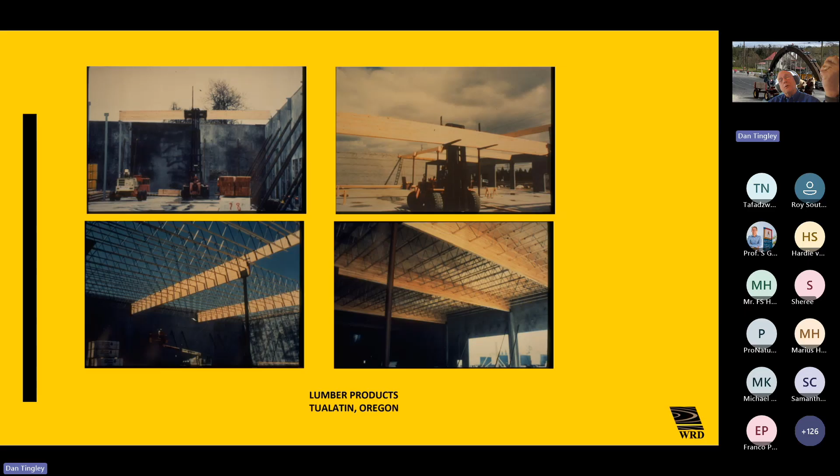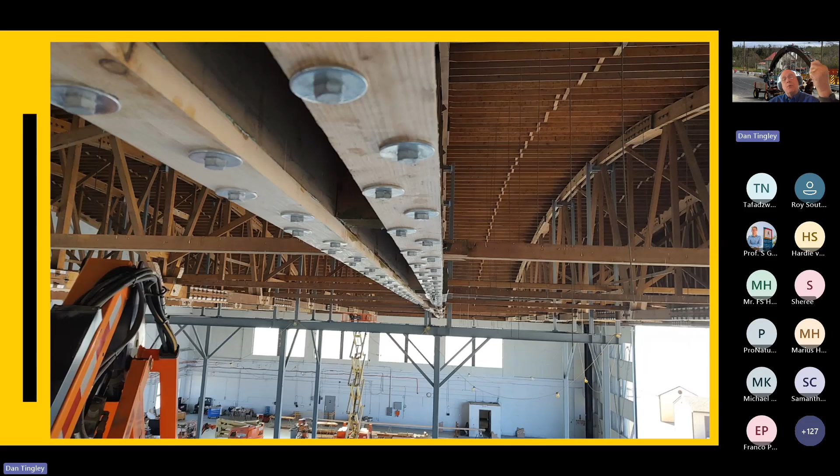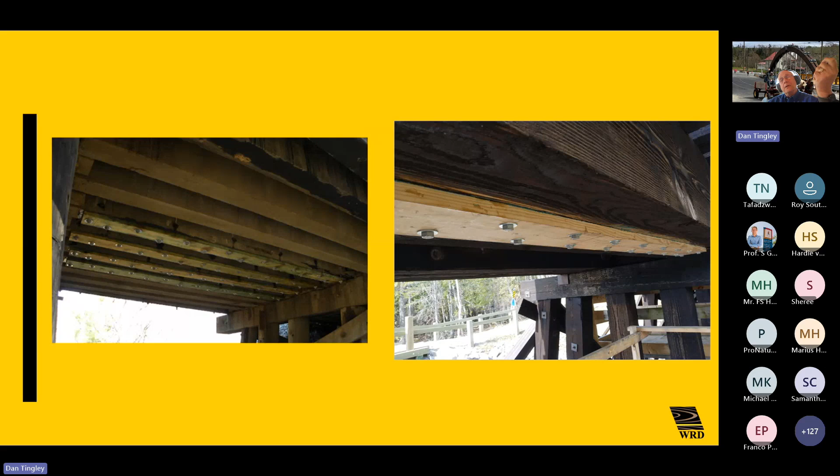We're also using high strength fiber today to repair existing bridges, go in and without taking a bridge out, upgrade its capacity, restore it, provide for a solution if it's broken. This is a big aircraft hangar in Idaho where the trusses were in trouble. They didn't meet the code and one of them broke, and they were able to go in with high strength fiber and resolve that and design solutions to put them in place and basically upgrade an existing building with high strength fiber and bring it back into service and extend its life.

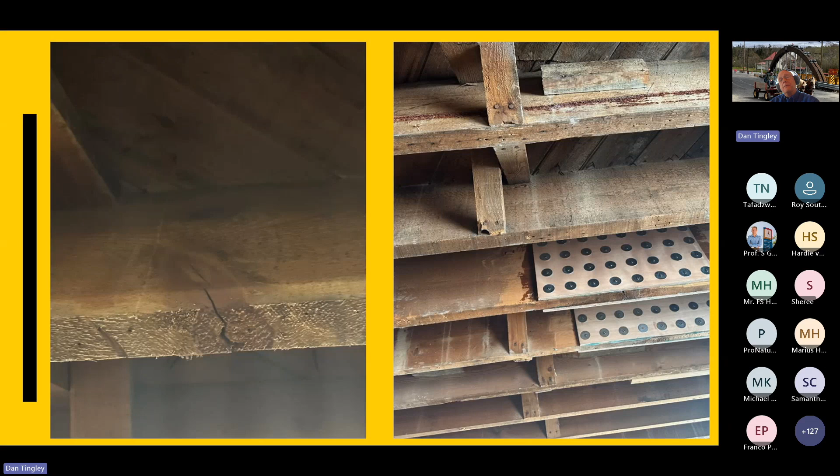With shear panels and high strength fiber, as you can see placed here on these broken arches, broken beams here, fixed in situ with high strength fiber, shear panels, and so on, that allow us to extend the life and the capacity of the piece and upgrade its capacity in place to handle new code requirements, or as in this particular case, where a low-grade piece of wood went into flexure and bending and failed in tension parallel to grain, fix that beam in situ, and do it with high-strength fiber.

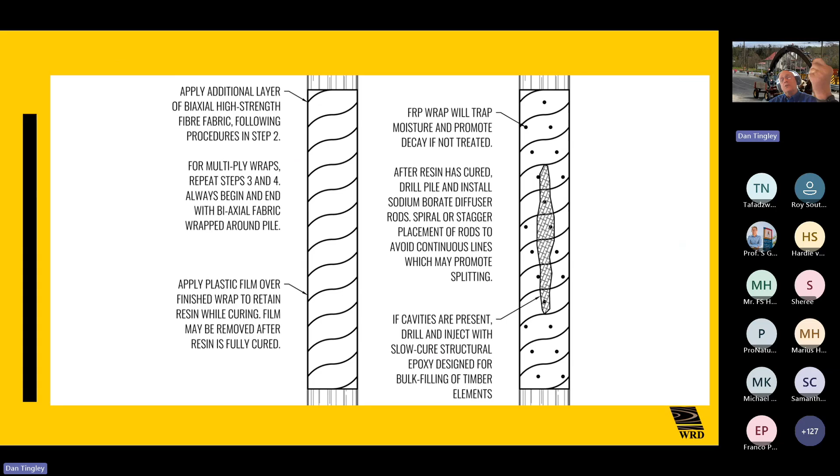So in all of the uses today we see high-strength fiber playing a role, not only in new construction, but in old construction. This is where our wood technology is going today, as we see existing timber piles resolved with pile wraps and injected with slow cure 2-part epoxies to restore in situ and extend life another 25 or 30 years, which gives great value.

Or if the pile has burst because of decay, to fix it in situ, as you can see here, and extend life and push it on down the road with wraps that are made in a special way so that the pile, when it expands due to moisture change, due to capillary action, doesn't lead to expansion stresses that tear that fiber and fail it in tension and hoop stress.

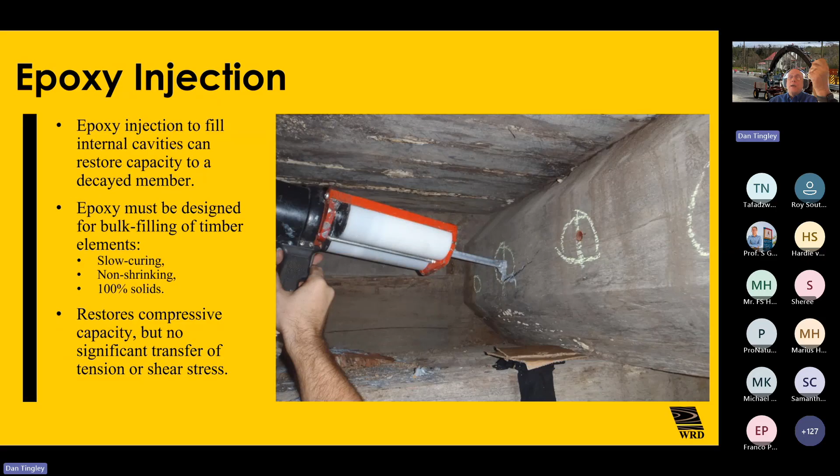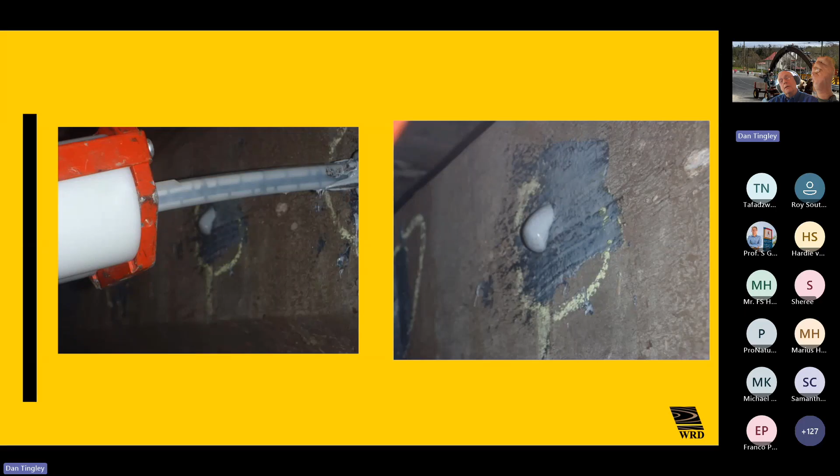A slow cure two-part epoxy that doesn't overheat and have exothermic runaway that burns up the building, but instead slow cures to restore compression capabilities within the piece itself as a slow, what we call low-cost, cheap modulus bulker. These are the sorts of things, and just to add a slide or two that was picking up on earlier points.

Decay in wood has often been our Achilles heel. Concrete used it to kill us in the 60s, 70s, and 80s, saying that wood doesn't last, concrete does. Today, we're seeing the end of that great concrete panacea. And why are we seeing it? Because people that have got bridges, for example, are realizing that concrete doesn't last 100 years, that at 40 and 50 and 60 years, reactive aggregate issues are all playing a role. Whereas timber, if you do the right job to protect it, it's going to last.

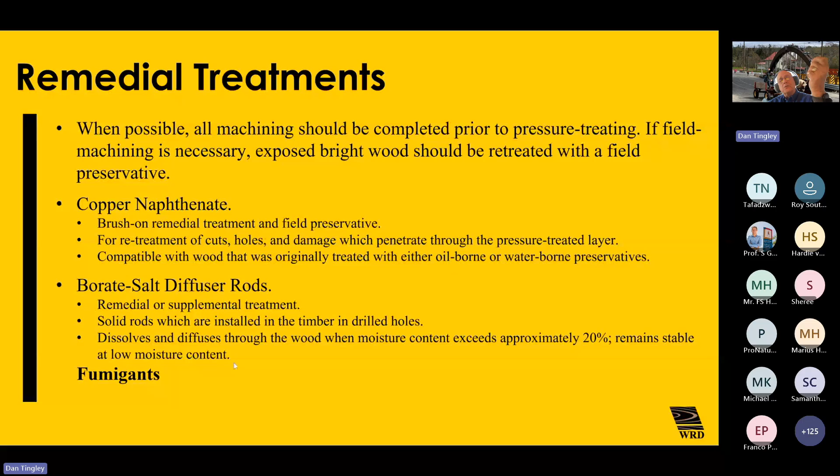And remedial treatments, for example, like preservative treatments, borate salt diffuser rods, fumigants, are all the ways today out in the marketplace that we can utilize to extend the life and provide for durability that matches concrete or exceeds it and get us down the road. As you can see, these diffuser rods with the borate salt that you can install in your piece and extend its life.

The borate salt is a salt that neutralizes the acidic content of the pH wave for a decay-causing colony, which creates that acidic environment to break the wood down. The salt neutralizes, it's called a diffuser, and it basically neutralizes the pH wave. You can see them put them in here to extend life.

So in conclusion, I appreciate your time. I just want to give you an overview and a sketch of how high-strength fibers are playing a role in today's society with mass timber, causing longer spans, providing for heavier capacities to be carried, and bolting timber back into the arena in situations like bridges, for example, and high-rise buildings.

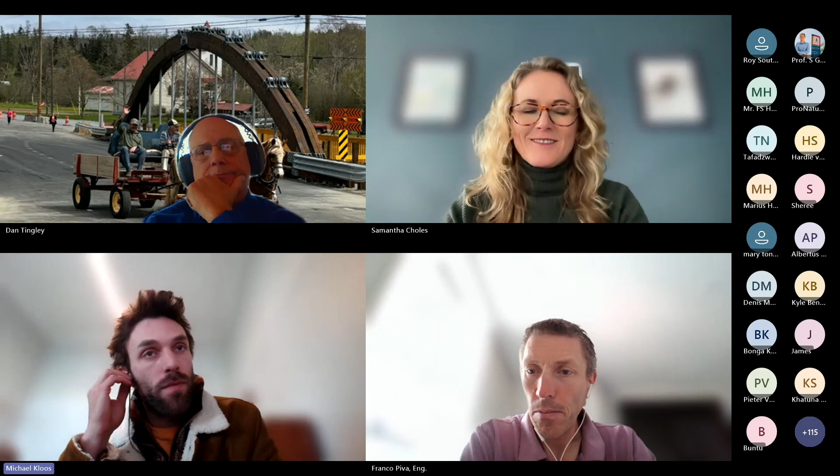My experience is more residential, so I haven't worked much with AC or HVAC, but I can say for fireplaces that your flues, you have to just keep them a certain distance away from the timber because of that risk. And if you have a heat source, you might just have more movement or drying cracks in your timber, but that's just a visual thing. So, timber moves a lot, but as long as you let it move.

How do CLT buildings perform in terms of earthquakes as compared to RC, reinforced concrete? One of the great things about timber is its ability to absorb acceleration forces. When you build a concrete structure, it takes a lot of special design to handle acceleration forces. And earthquakes move the ground very quickly and accelerate the base with respect to the upper portions of the structure.

And so timber, because of its low E, modulus of elasticity, which relates to stiffness and deflection, it's low E, it's given its Achilles heel. But quite frankly, in earthquakes, wood's Achilles heel, which is its low E, turns into its huge benefit, because it acts more with elasticity to earthquake acceleration loads. And quite frankly, timber is an excellent material to use in an earthquake-prone area.

I love to do it. When I get a design, Vancouver, for example, Japan, I designed a bridge one time in the northern island of Hokkaido in Japan, where they were really worried about earthquakes. And it was a pleasure to be able to design that bridge in timber versus reinforced concrete. Wood is just superior in its performance there.

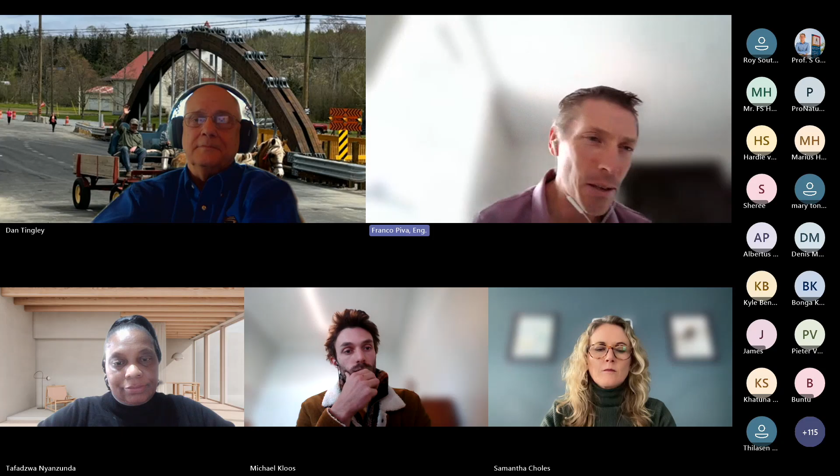Yeah, I would add a couple of things on top of what Dan already said. One thing is the lightness. Timber is about 80% lighter than concrete. Yes. So it is 500 kilos versus 2,500. So it is very light, and this helps a lot.

And then another thing is that timber performs very good when the loads are very short. The duration of an earthquake is a few seconds, luckily. So timber performs very good when these loads are very quick, like from seconds to a few minutes. The combination of that, the result is a very good material to use in case of earthquake.

I just wanted to add that with earthquakes, timber is great because of all the things that Franco and Dan have said. One might just look at the connections as well and ensure ductility in your connections. So much of timber design comes down to the connections. It's the same for seismic. So the timber is great, but if your connections are too stiff and take too much load, then they can break. So just something to consider in seismic design.